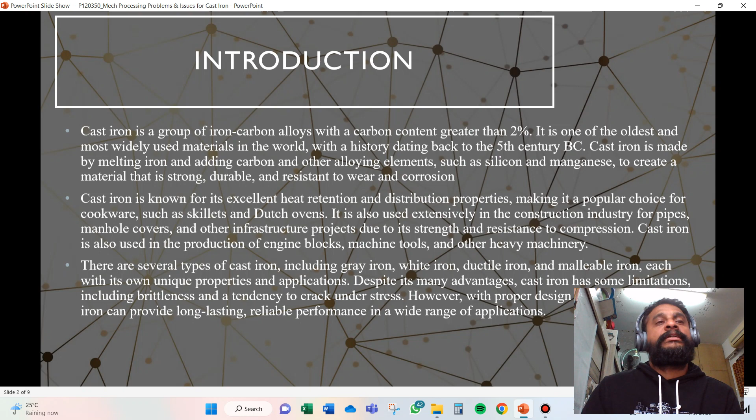There are several types of cast iron, including grey iron, white iron, ductile iron, and malleable iron, each with its own unique properties and applications.

What are the problems and issues of cast iron? Brittleness, corrosion, heat sensitivity, machinability, weight, limited design flexibility, environmental concern - these are the main problems and issues of cast iron. Cast iron is known for its brittleness, which makes it prone to cracking or breaking under stress. This is because of its high carbon content.

Corrosion: cast iron is also vulnerable to corrosion, especially in damp or humid environments. Heat sensitivity: cast iron is sensitive to changes in temperature and can crack and warp under extreme heat or cold.

Machinability: cast iron can be difficult to machine, particularly in high volume with complex shapes. It is also abrasive, which can damage cutting tools and increase machining cost.

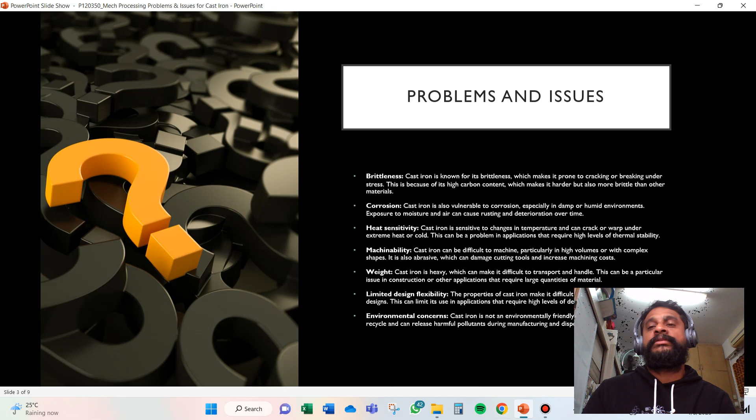A brief explanation on the post-processing of cast iron. Post-processing of cast iron involves a combination of cleaning, machining, heat treatment and surface finish to achieve the desired mechanical and aesthetic properties. Heat treatment is one of the post-processing steps. In heat treatment, we have two types of process: annealing and hardening process. In this slide, we have also presented a simple brief outline of the steps of the annealing process and also the hardening process.

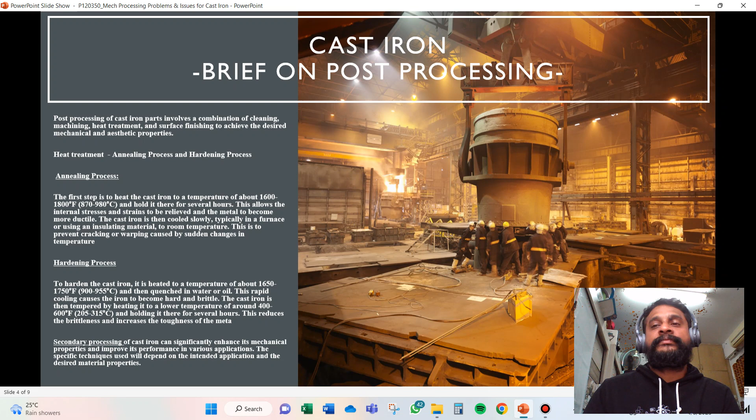Strengthening mechanism for cast iron. Alloy elements such as nickel, chromium, molybdenum, and copper can improve the strength and wear resistance of cast iron. Heat treatment can also improve the strength and hardness of cast iron - for example, austempering and martempering can produce high strength, wear resistant cast iron.

Pearlite formation: cast iron can be strengthened by increasing the amount of pearlite in its microstructure. This can be achieved by slow cooling or annealing at a specific temperature. Work hardening: cast iron can be strengthened through cold working or deformation, which can increase its strength and hardness, but may also reduce its ductility.

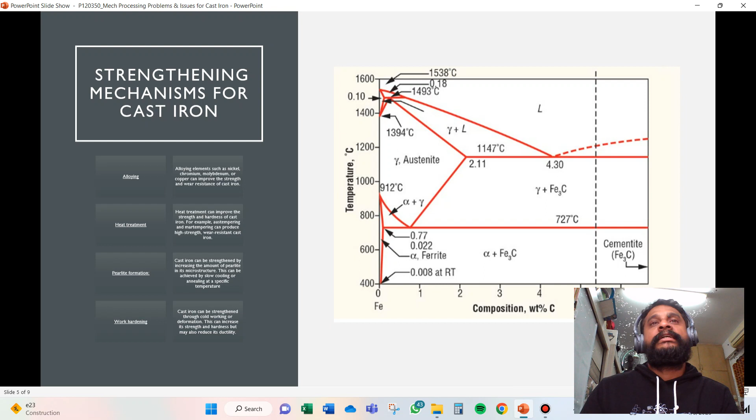On the right hand side here, we're showing a chart of austenite and ferrite. The details here show an example of how our diagram looks.

Failure mechanism for cast iron. These are the few that I managed to get from the internet, which are corrosion, erosion, fatigue failure, and thermal fatigue failure.

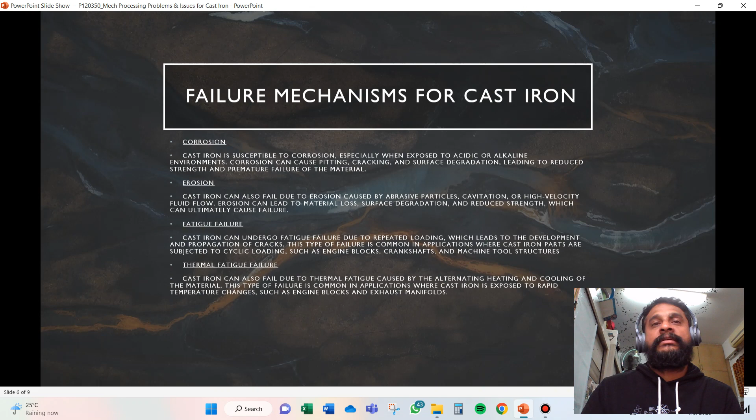The sustainability contribution from cast iron to development: environmental sustainability, social sustainability, and economic sustainability. Cast iron is a material that has been used for centuries in various applications, ranging from cookware and construction to machinery and transportation. Sustainability is a multi-faceted concept that involves social, economic, and environmental considerations. Cast iron has the potential to contribute to sustainable development in several ways.

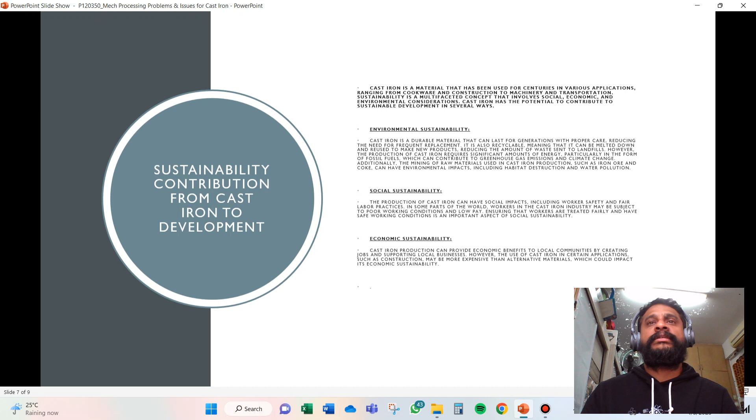Report of conclusion on cast iron. Overall, cast iron can be a sustainable material if it's produced and used in a way that takes into account environmental, social, and economic impact. This may involve using renewable energy sources in production, ensuring worker safety and fair labor practice, and considering the long-term economic cost and benefit of using cast iron compared to other alternative materials.

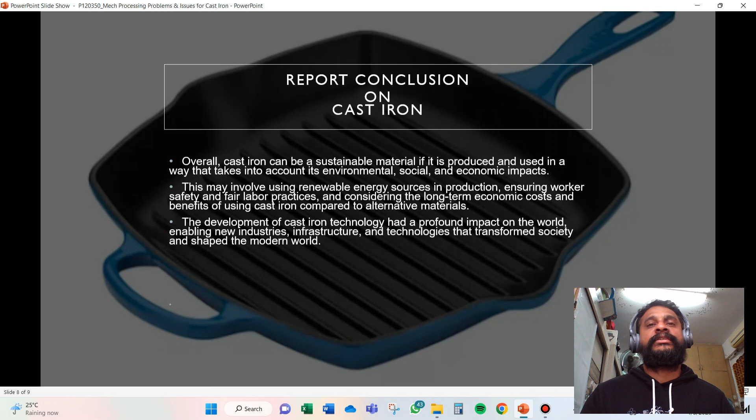The development of cast iron technology had a profound impact on the world, enabling new industries, infrastructures, and techniques, and transformed society in the shape of the modern world.